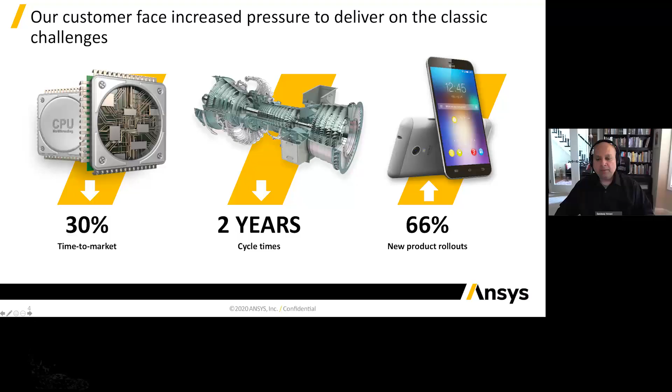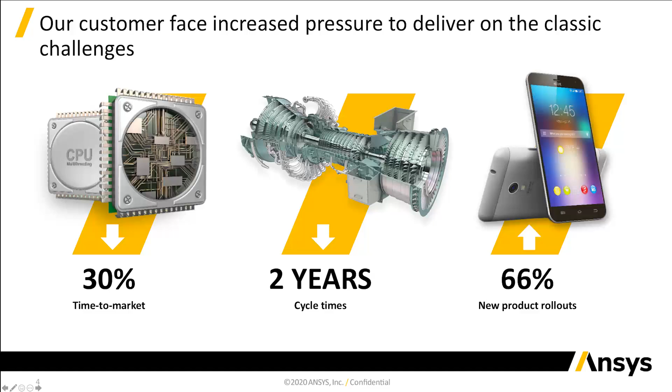Imagine reducing cycle time down from 2 years to, say, a year and a half, and what advantage that will give to your company. And imagine the amount of new product rollouts that you're able to do. Say you're able to do a 66% increase in the number of new products that you can take out to the market. All of these things can have a significant impact on the business of a company. And simulation is something that can help you achieve that.

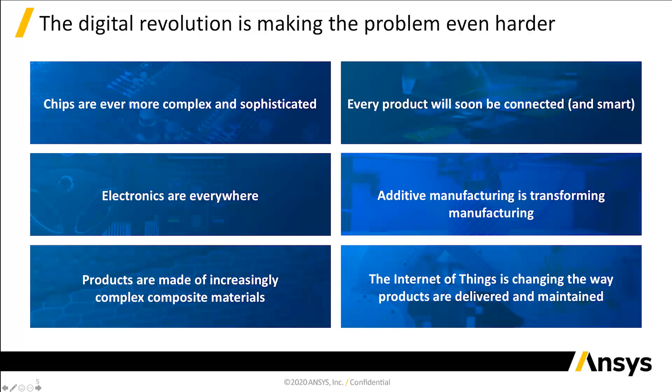The reason why simulation can help you achieve that is product development processes are getting complex with the digital revolution. There are many new complex things that are coming up as a part of our product development process. Chips are more and more complex than ever, which means the smart functionalities that we can embed into our systems can be highly complicated. Electronics is everywhere. There are dozens and dozens of ECUs and interconnects, etc., in a modern vehicle, including millions and millions of lines of code. That is bringing enormous amount of complexity.

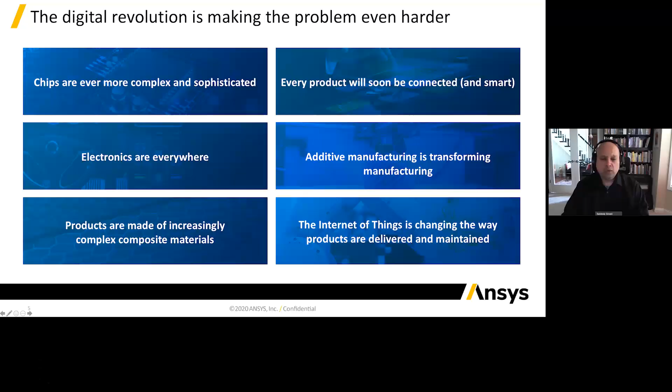On the production side, we are now using more and more complex materials like composites, additive manufacturing, for transforming our manufacturing processes. The Internet of Things that is emerging with technologies such as 5G would mean that every product will soon be connected to every other product. To be smart would be collecting a huge amount of data as the vehicles are rolling down the road, and they would be connected. That creates challenges, but also different monetization opportunities if we are nimble and able to take advantage of these new technologies that are coming out.

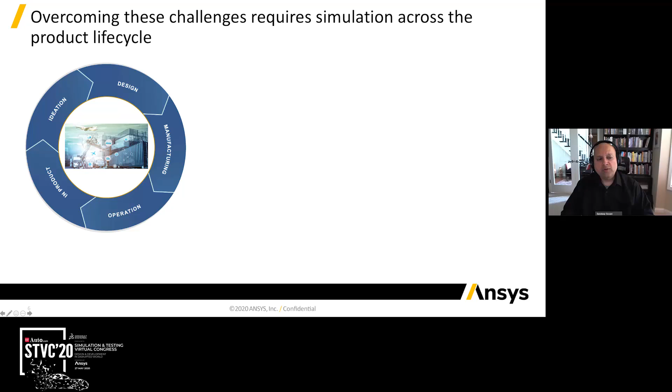Simulation, as I mentioned, helps in overcoming these challenges throughout the product lifecycle. So here's a chart which roughly shows you 5 stages of a product lifecycle. The first stage is ideation, where we are simply thinking of original germ ideas and playing with the ideas of a new product. Then comes the design phase, and then comes the manufacturing phase.

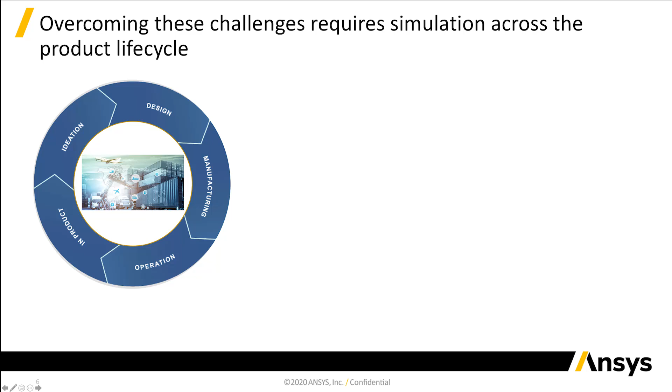Then comes the phase of operation of that product. And with sophisticated ECUs and computers embedded within our products now, in some cases, simulation even runs within a running product and is guiding the running of the product from within. So those are the 5 stages. Simulation helps through these 5 stages of the product development process, essentially by converting data into insights.

First of all, simulation helps accelerate your new product insertion into the market by cutting down your product development time. It helps improve your operational costs. It helps develop better products, improve the quality of your products. You can test your products in many different ways before they are released. And it helps you develop deeper customer relationships by delivering better quality products.

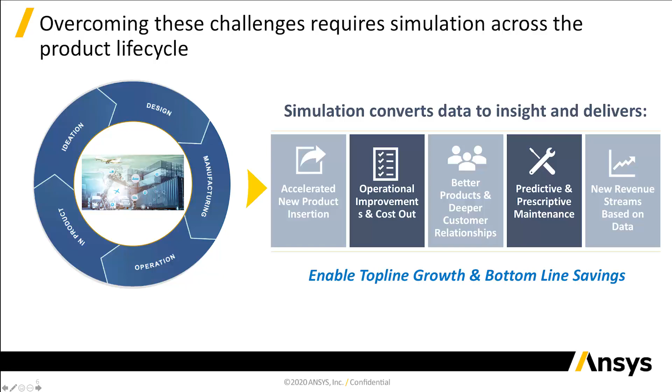It can also help for complex machines, helping with predictive and prescriptive maintenance. Imagine being able to send an email to your vehicle customer, warning them that within the next month or so, they might need to get their brakes fixed, for example, or their suspension fixed, based on analysis and simulation running in the background using data coming off the vehicle. Such things can help you generate new revenue streams based on data.

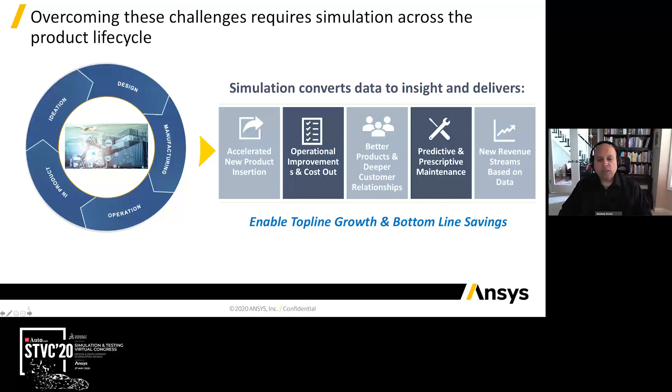This whole connectivity infrastructure is going to bring us an enormous amount of data. If you can simulate and analyze the data in better ways in the background, it can help create new and better streams for monetization, apart from the traditional manufacturing and selling products based streams we have. Ultimately, simulation helps enable top-line growth by adding new revenue streams and getting to market faster, but also bottom-line savings by improving the efficiency of your product development process.

Simulation has become critical now throughout the industry. Simulation is actually delivering ROI to customers. And this is proven ROI and measured ROI that simulation is delivering to customers.

This is information from an Aberdeen Group study done a couple of years ago. Aberdeen Group reached out to many different engineering companies around the world and had a number of survey questions for them. One question they asked was, what percentage of your company's products currently meet your targets? These targets are essentially launch time targets, so start of production targets, cost targets, and quality targets for the product. They grouped the companies they surveyed into two buckets.

First are companies that, based on other survey questions, they identified as systematically using simulation throughout their enterprise. The other set of companies don't systematically use simulation across their enterprise. They might be doing pure simulation, in some cases they might not be doing simulation at all, or they might be doing spot simulation that is not coordinated between departments across the enterprise. These companies that don't use simulation are shown on the left-hand side column, and companies that use simulation systematically throughout their product development process are on the right-hand side column.

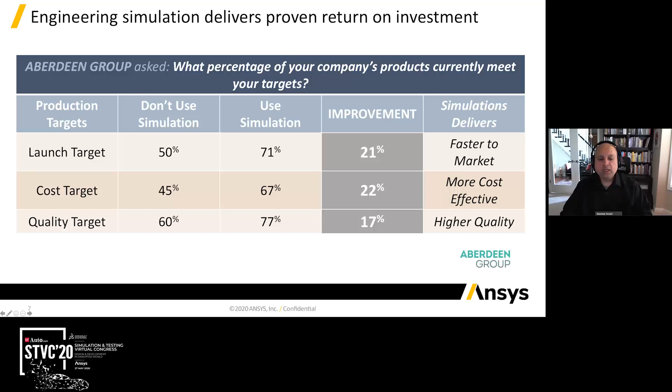So what is it that needs to be done? Deploy simulation systematically across the enterprise. There are five tenets of what needs to be done to deploy simulation systematically across the enterprise, and I'm going to talk about each of these tenets on my next five slides.

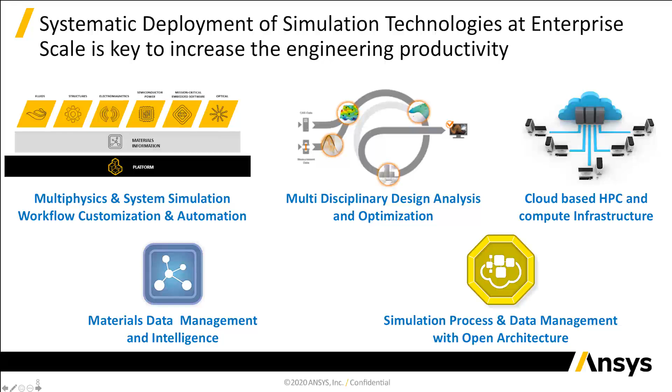The first tenet is doing multiphysics and system simulation in a customized and automated way. We'll talk about all of this, so I'll just introduce these topics here and then move on. The multiphysics and system simulation is the first one. The second is multidisciplinary design analysis and optimization. The third is cloud-based high-performance computing and compute infrastructure. The fourth is materials intelligence and materials data management. And the last is simulation process and data management with an open architecture.

So let's talk about each of these and see how they are crucial for maximizing your enterprise efficiency. The first one is about multiphysics and system simulation, and we will look at that from the context of an electric vehicle design process.

Think of an electric vehicle's powertrain. It consists of an electric machine, a battery, controls, power electronics, functional safety, and all of this requires thorough system engineering to be done. That thorough system engineering can be done with simulation. You can simulate the motor and the batteries individually, but you can also do a system simulation with co-simulation and reduced order models of all these components to characterize things like the drive cycle performance of the electric vehicle, what's going to happen to the battery for a particular drive cycle, for instance, and things like that.

Now, all of the systems we deal with in modern vehicles are highly complicated. Therefore, this multiphysical simulation is essential. Multiphysics essentially means not only doing thermal analysis or structural analysis or electromagnetic analysis, but doing all of these things together. This is crucial for something like an electric powertrain, where a motor is a highly multiphysical object, which has structural, electromagnetic, and fluid forces all acting together in the motor.

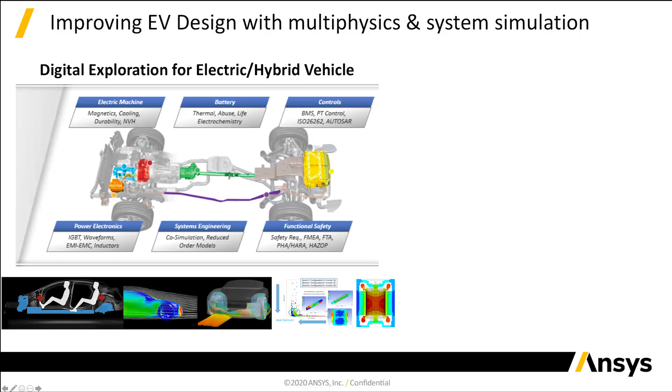And this delivers real results. So you see it as an example here from one of our customers, which is Lucid Motors. They have deployed the ANSYS multiphysics simulation platform, which addresses the needs of their subsystem and component development. And they have been able to get real ROI out of it. For instance, being able to reduce the dyno calibration time by 80%, or increasing the motor's power density and energy efficiency by 12%, which is a huge increase if we think about it for an electric vehicle motor's efficiency.

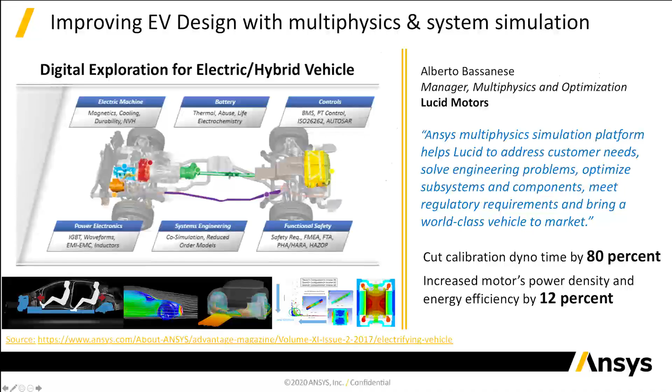Next part of the tenets is multidisciplinary optimization. So we'll again look at multidisciplinary design optimization from the perspective of an electric motor in a hybrid and electric vehicle perspective. Let's look at what sort of optimization needs to be done.

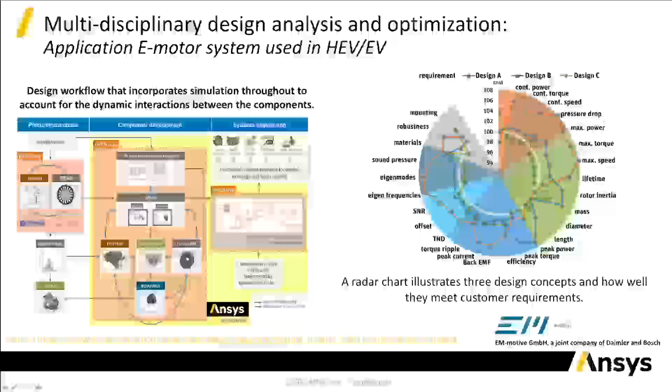So take a look at the radar chart on the right hand side. Here are different parameters of a motor that need to be optimized, and there are literally dozens of parameters. You're just seeing a few of them over here, such as mass and diameter and torque ripple and the sound and the peak torque and things like that.

And here you see the requirement shown in the inner circle, and then three different designs, A, B, and C. Through doing systematic simulation with the workflow like that shown on the left-hand side, it has been possible to systematically move to better and better designs, from design A to design B to design C.

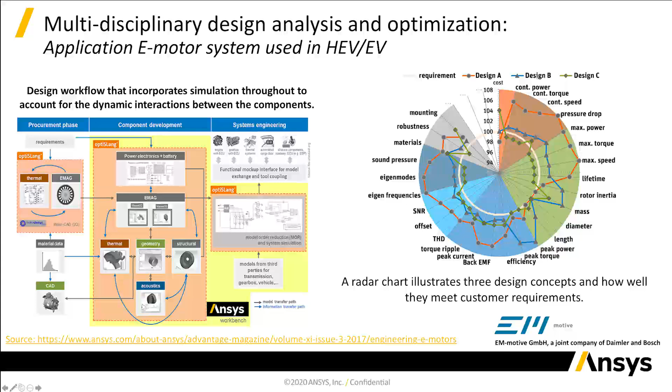Here, the simulation process goes on right at the procurement phase at the very left-hand side with materials data. Then the component development phase, a significant amount of optimization across the thermal, structural, acoustic aspects of the motor. And then the system engineering, which is engineering the motor for system integration.

The third tenet is essentially about cloud computing and cloud infrastructure. What cloud computing and cloud infrastructure essentially bring to us are several aspects. Elasticity, which is giving access to adequate compute capacity as and when required. And this can improve your speed and agility of your product development process.

So if you can quickly get access to compute capacity which is needed with changing business needs, like a new project that has come up or a new product launch that you need to do, that improves your speed and agility.

You can optimize your expenses, so you don't have to plan your compute infrastructure for peak capacity, but you can plan your compute infrastructure for average capacity and then use cloud for burst capacity.

It also helps you in improving your business focus. You're not in the business of computational hardware. You're in the business of developing automotive components and developing vehicles. Using a cloud-based compute infrastructure takes focus away from what could be wasted in managing compute resources, and it helps you focus it on other business critical aspects.

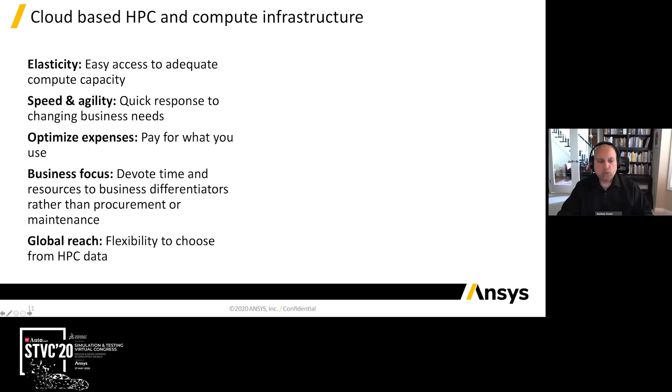You can have a global reach with the flexibility that is afforded by the cloud. So if you're a global company, that global company can have equal access to computational resources for your engineers all around the world. ANSYS offers a cloud computing service through Microsoft Azure, and a number of our customers have been using that for quite a while now.

An example you see here is from Lear Corporation, where ANSYS Cloud reduced the solve times by 5 to 6x and cut the entire simulation workflow by half.

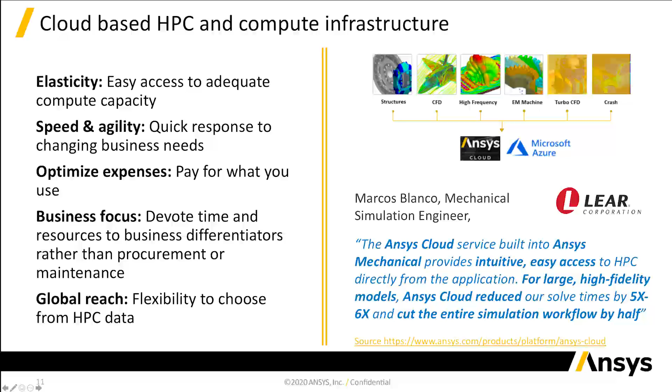The next tenet is about materials intelligence. There was a survey done a couple of years ago by ANSYS subsidiary named Granta, and they found out that an average engineer spends about half an hour every week simply looking for materials data. If you think of thousands of engineers around your enterprise doing that, that's quite a lot of wastage.

Other things that were found: many of the materials tests that are done are actually not required because the data already exists. About 20% of materials tests done in a company actually duplicate existing data just because that data was not accessible to the individuals who needed it. It was also found that material tests are often done and not reused. So 50% of all these expensive tests were used only once and never reused. So there is a lot of wastage over here.

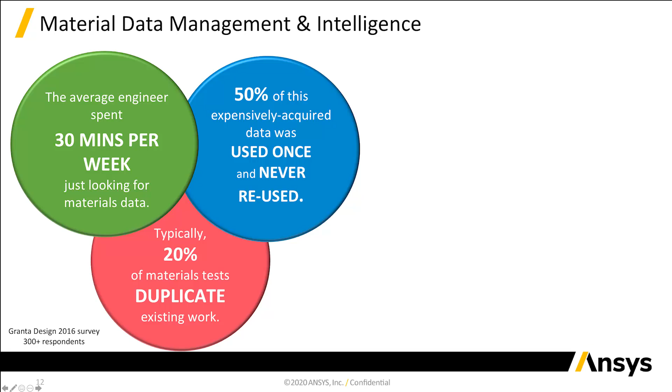To reduce this wastage, ANSYS provides a materials intelligence platform from our subsidiary called Granta. This is a leading materials system for materials information and management in engineering enterprises. Just think about it: if you are able to reduce your material consumption and types of materials, you can have a significant amount of saving across the enterprise.

And the last tenet is about deploying simulation at an enterprise level. To deploy simulation at an enterprise level, across the entire product lifecycle management, you have to go through different systems: requirements, concept, preliminary design, detailed design, and then manufacturing.

For that, ANSYS provides a platform that connects with our entire simulation toolchain. This is the ANSYS Minerva platform. It has data flow, data models, workflow, dashboards, configuration management, etc. All the tools needed for management of your simulation at an enterprise level across disciplines, whether structural, thermal, CFD, across engineering roles, electrical engineers, mechanical engineers, all the way up to management of engineering, and for different attributes like crash test, NVH, vehicle dynamics, EMI, EMC, etc. So this tool applies across thousands of engineers across the enterprise.

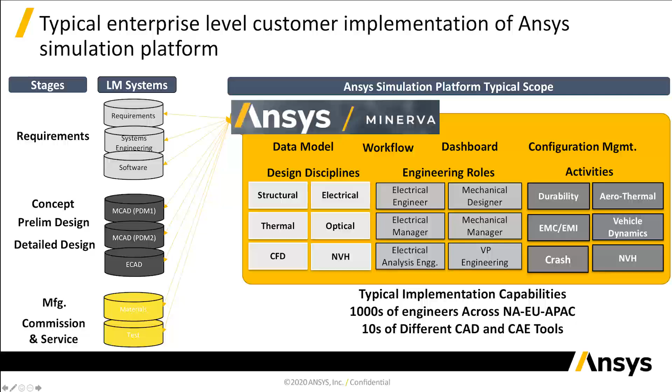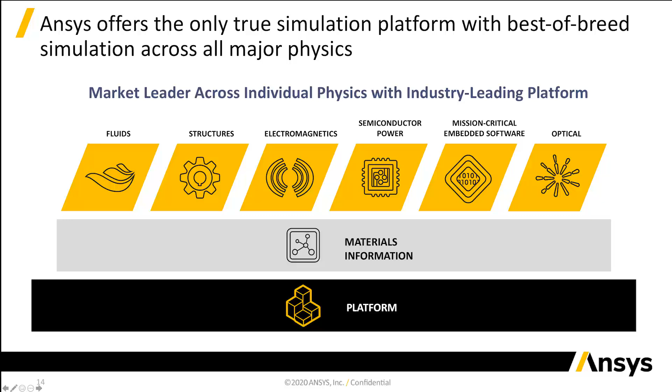ANSYS offers the only true simulation platform that enables you to scale simulation across the enterprise systematically, comprising multiphysics solvers, a materials information platform, and a simulation process development platform, all together in one.

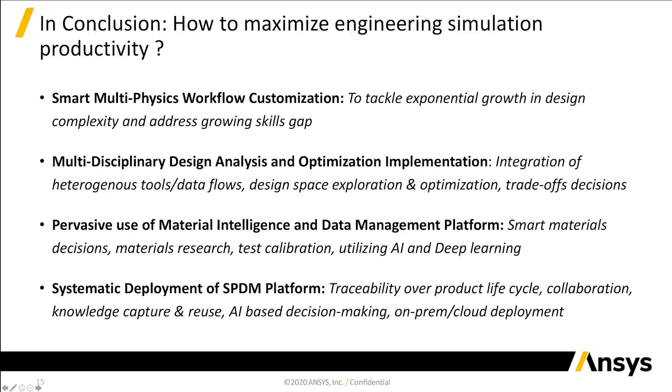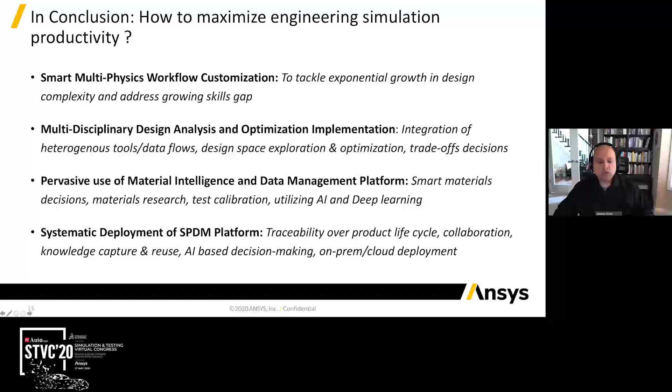So in conclusion, there are four things to take away on how to maximize your engineering simulation productivity. First, use smart multiphysics workflows because the products are complex and multiphysical. Secondly, use multidisciplinary design analysis and optimization to optimize your products in the best possible way. Third, use pervasive materials intelligence so that you can reduce your materials costs and improve efficiencies in materials management. And lastly, deploy a systematic simulation process data management platform for truly scaling simulation across your enterprise in an efficient way.